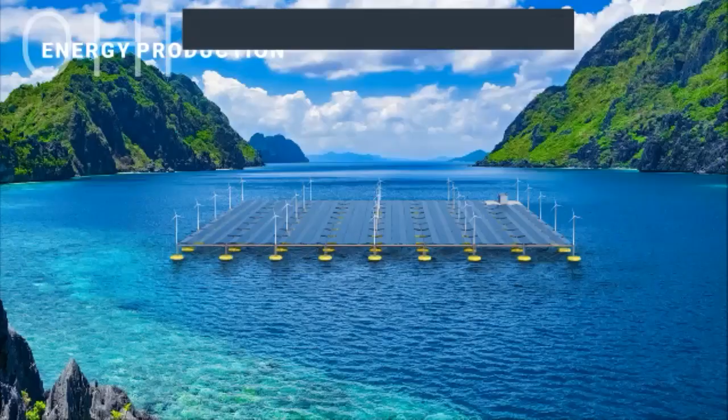What you see here is more or less the base situation of our hybrid platform. We have developed a floating power plant, which is able to produce electricity out of ocean waves, solar radiation, PV, and small wind farms, all combined on the same platform and connected with the same electronic smart grid system. In the back, you can see it's also used for platform facilities. This is a real ocean-designed solution for harsh environments, strong waves, and strong winds. A really cool thing here is the combination of multiple renewable energies, which gives you the opportunity to customize the technological layout of the platform according to the climate conditions.

If you go into regions where there's a lot of sun but not so much wave or wind energy potential, you would primarily put PV modules on. However, if you go to regions with a lot of wind and wave, you could increase the share of wave and wind energy. A little bit more you will learn about this in the presentation. We also have storage systems, etc. But this is the base - we can adjust in size and in combination of renewable energies, to the location and the requirements of the customers.

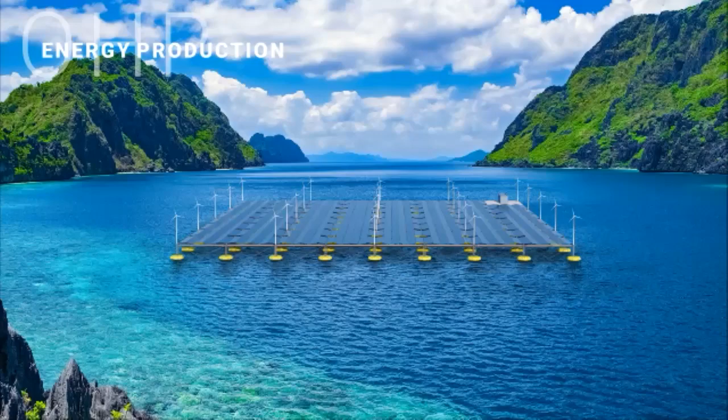Obviously we are not experts in aquaculture, but this is one vision that we have. We want to bring processing and infrastructure to the sea, and we want to do this all with a sustainable approach - a floating, low-impact solution.

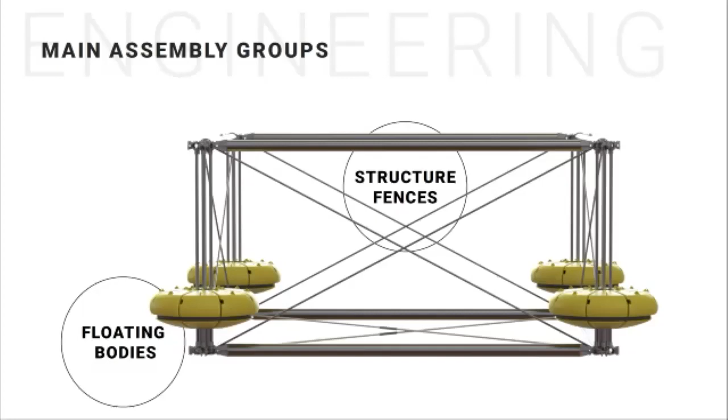Let's look a little bit into the engineering behind this technology. We're breaking it down into the main assembly groups: the structure fences and the floating bodies. There's a lot more detail in the small parts, but we won't go into too much detail, it would take too long. I think what we'll show you now will cover the fundamental principle and show the ease of installation and handling that comes with the OHP.

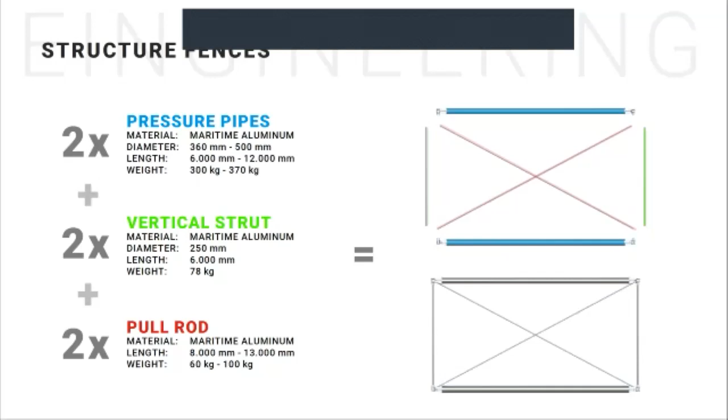Yeah Johannes, let's go on, maybe we can explain the first parts. We have been trying and re-engineering our structure a lot of times to optimize and simplify the solution. In the end of the day it looks super simple and trivial, but coming to this point needs a lot of engineering. It has to restrain big waves and storms in the ocean, and it has to be easy to manufacture, easy to build, everything. So all this comes into this product, which in the end looks trivial and easy.

But here it is, we start with the structure fences. They come with pressure pipes, you see them in blue on top. They are 6 to 12 meters in length, so fairly long actually. We're talking about big pieces here, but they're not so heavy, about 300 to 370 kilos each.

You cannot handle this by yourself, but being a few people you could even lift it, or use small forklifts. So we've made sure we don't get too big parts, so we can install that wherever we want. The vertical struts are much lighter and 6 meters high, and the pull rod. In the end of the day, we construct a structural fence which is super stiff, made out of maritime aluminum, without any problems in corrosion, and durable.

At this point, Philipp, there's two important things to add.

One of them being, of course, that these pressure pipes are welded, they are sealed, which means that they can float. This is one important aspect. So they already have their own buoyancy.

And the second thing that I would like to talk about, because this is a question that I get asked almost every time we talk about the OHP, what about corrosion? Yeah, I have given that for short. We have found that the corrosion is solved best, and we don't have problems anymore since 2015 actually. In the beginning there was, but now we found a really good maritime aluminum with small connection pipes of stainless steel. So you have a really durable and robust saltwater-proof solution. So to cut a long story short, we don't have problems with corrosion.

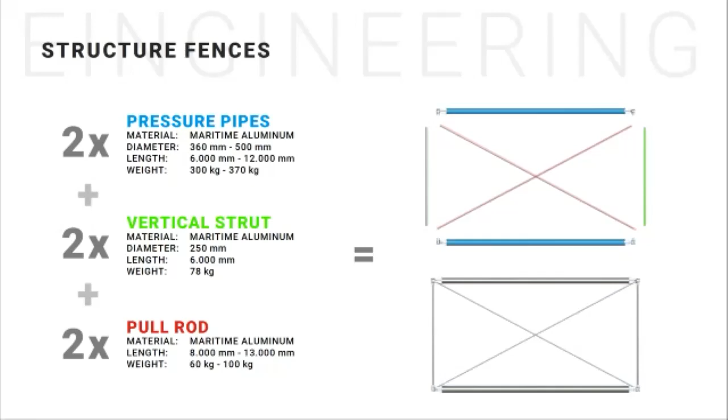No. Perfect. All right, now let's move on to the second main assembly group, which you can see here are our floating bodies, obviously also following the same modular approach, easy to handle, not too heavy, can be fitted into containers for shipping and stuff like that. What is special about these floating bodies? Yeah, as with most of our products, we have patents on that, because all of our products are new and we are approaching a new market.

And the speciality about this floating body is this floating body gets the whole force of the waves. It's the first interaction with the waves and the environment of the water, and this has to be super durable, super stiff, super hard. And the solution here we found is a polyethylene solution, which is designed like a cake. So you have many small pieces, you see them on the top picture, which come together in a connection hub in the middle, which is made out of a strong metal.

You bring them together and you put a belt around so it cannot fall apart anymore. And that's it. It's super simple. It's relatively small and lightweight parts each. And then you can design a floating body of a lifting capacity of 6 tons with a diameter of 3.2 meters and a height of 1.5 meters.

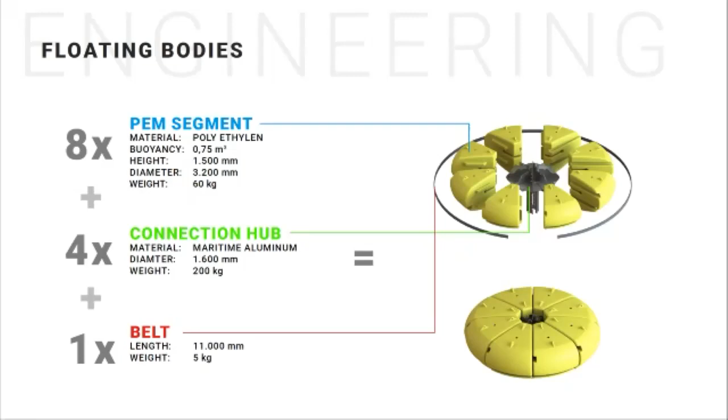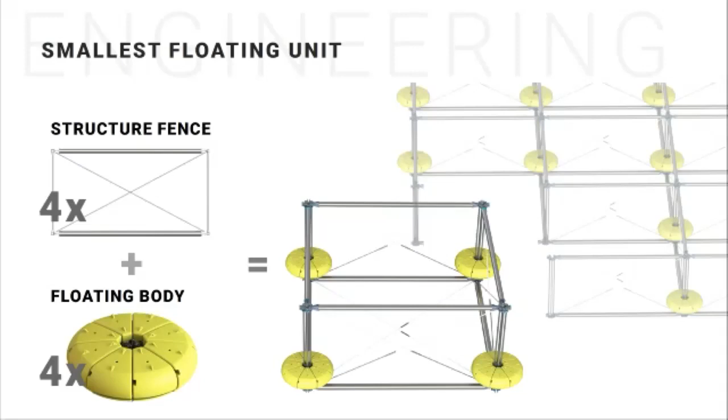That's quite amazing. Absolutely. So now when we put the structure fences and the floating bodies together, what do we get? Yeah, bringing 4 of these fences together, adding 4 of these floating bodies, you get the smallest floating unit. So that's what you see here in the front, and from there you can go on. You can go in either one direction or in both directions, and can increase your platform to any size you want. And therefore you're super flexible in the dimensioning, and obviously you can design any large floating platforms starting with small parts. This was not possible until now. Any big platforms in the world, they need big ports, big cranes, and then they can be designed.

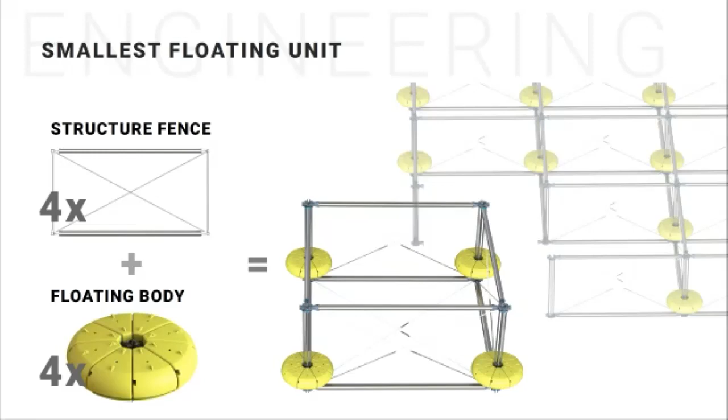Perfect. I think we have a demonstration video on the installation that we will show you later on in this presentation. But now obviously we have shown you how the technology, when assembled, works and how this modularity and flexibility can be brought into the OHP system. What you saw in the visions before, obviously, is much more the use cases that are accompanied by this technology. And it's important for us to give you a better understanding of the customization opportunities that come with the OHP in order to make these different use cases possible.

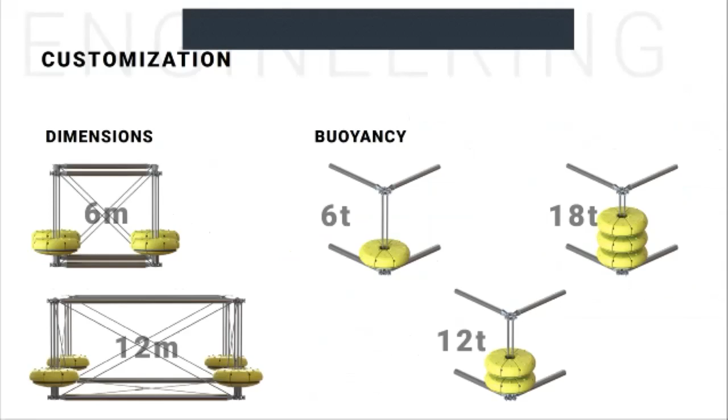So we can vary a little bit in the designs. Everything is designed to be modular, to be easy to build. And what you see here is on the left side a dimensioning. You can change between a distance of 6 to 12 meters in each of these squares. Why would you do that? Because when you have stronger forces, especially for carrying heavy weights on top of this platform, you might want to have a smaller distance between each knot. And it's possible only by changing the length of these pipes. All the connection points etc. are exactly the same as they were before.

On top of that, we can vary the buoyancy on each knot by 6 tons. Each floating body has a buoyancy of 6 tons upwards, and you can add to each knot up to 18 tons of buoyancy. That makes a lot if you calculate it in a square.

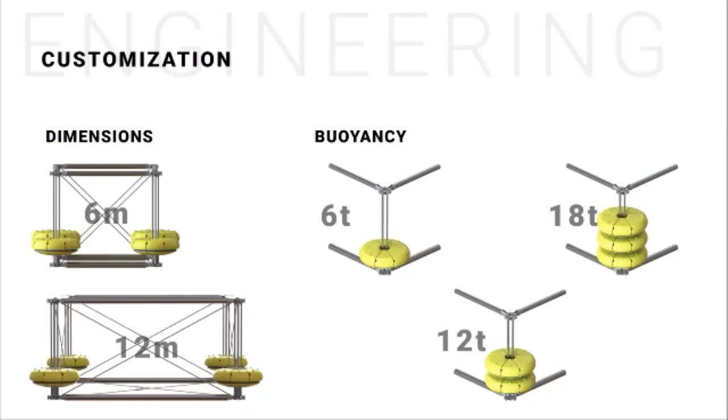Absolutely. All right, so now we've learned about all the technical stuff, but now it's also really important to talk about the renewable energy integration. And I want to start off here, Philipp, with the wave energy integration, since this is also where SINN Power initiates. And I think it will be really simple to explain, because it's such a simple principle how it works.

Yeah, I hope it's simple, but I think it's simple. Imagine you have a given platform and not every knot is connected with a floating body here in the side, the black floating body now, to get a better understanding. So the platform is given, some of these floating bodies in some of the knots are installed. They are actually installed without vertical movement, so they're fixed to this platform.

Then you go with a lifting rod in red, you come from the bottom and push this lifting rod into the center of this knot and connect from the outside the floating body. So the floating body is separated in parts, so you can install it after you have installed the platform itself and connect it then with this lifting rod in the middle.

This gives a flexible floating body which can go up and down with the wave, which is connected to the lifting rod. So when this goes up and down with the wave, the lifting rod goes up and down. And on the top, we put our Modtronic powertrains, which are computer-controlled electrical machines, which then run with the movement of the vertical rod up and down and produce the electricity in the wave power module. That's as easy as it is, and it's really not much more than you can see here.

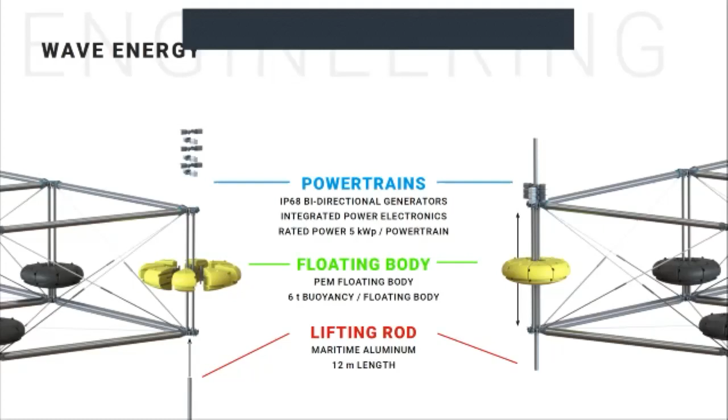Okay. Now, the second solution, which shares a lot of components with the wave energy, is the wind energy solution. Philipp, please explain. So having the same platform again, you use the knot, this time not for wave power. You have to decide. Either you can use wave power at a given knot, or you can install wind power. But we use the same mast. The pipe, which is running up and down in the wave power device, can be fixed to this knot, so it goes above the platform, and there we can install a standard windmill.

We have a special windmill here. This is a cooperation development with our partner and friends Luvside, which also live here close in Munich. And they have designed a super nice windmill, which is storm resistant and can still run in storms and uses the same power electronics we use all around our systems. That's the Modtronic powertrain, which we will also explain in one of the further slides.

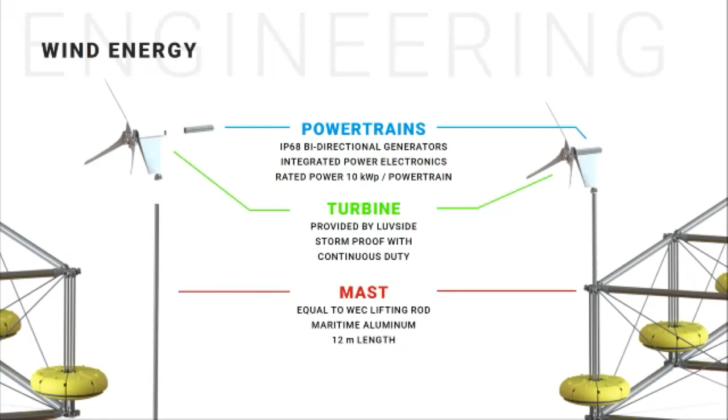But just to resume, the powertrain is the same and the mast is the same. So 2/3 of the system for wave and wind seems to be the same. Yeah, and especially we can use it and easily integrate it in our platform. That's a big advantage. And now, of course, last but not least, we also have a solution to install PV on our OHP. Obviously, if you have a large surface that you're already providing, it absolutely makes sense to install the sophisticated technology here.

Philipp, I think the really crucial aspect here are the traverses, which are able to withstand these forces. So please explain a little bit. Yeah, we have developed lightweight traverses which have a length of 12 meters and only weigh 130 kilo and carry 1,000 kilo per meter. That's quite a lot for this span of distance.

So we place these traverses in the same distance of the length of the PV modules, one to the other, and then we just put PV modules on top. We can vary the angle by installing these traverses on a different level, and then in the end you have a PV plant on top of your platform.

A big difference, which you should never compare, are inland water floating solar systems, which are coming as carpets. So these are flexible systems laying on the water, and when there are waves, they bend with the waves. We have designed a super stiff and robust wave resistant platform, which does not bend, or it bends obviously a little bit, but it doesn't bend with the waves over the length, and it has a high distance to the water surface. This allows to run this solar platform even in big waves, 6 meters breaking waves and higher waves in the ocean.

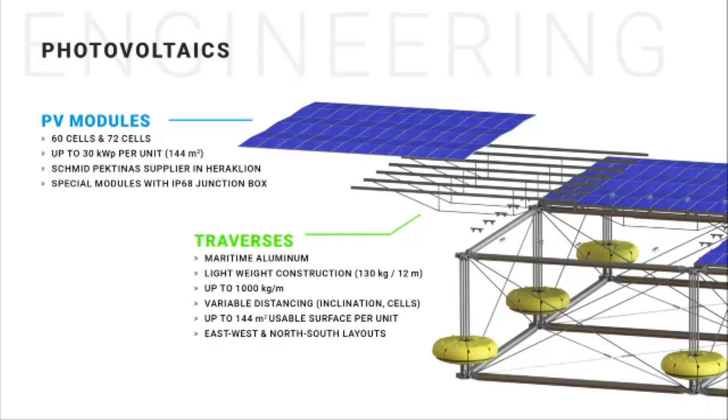Yeah. So the same principle we use in the PV to house the modules, or to have the modules on the platform, we can also use to put on solid floors, which obviously, if you have this amount of infrastructure or installed capacity, you require some of the fields to not be reserved for renewable energy production, but much more for electronics or for the other infrastructure that we have shown. Yeah, the industrial island, as we call it, to put infrastructure or any operation facilities onto it.

And because we can change the distance of these traverses, and they have by themselves quite a big carriage which they can carry, we can bring up to 1,000 kilograms per meter, which then, if you go in a distance meter by meter, means you can bring up to 1,000 kilograms per square meter onto our platform. This is quite amazing. This is quite a lot. This is more than you have in a typical house for the flooring, actually. Cool. So you can really build really strong and stiff, solid floorings for infrastructure use on this platform.

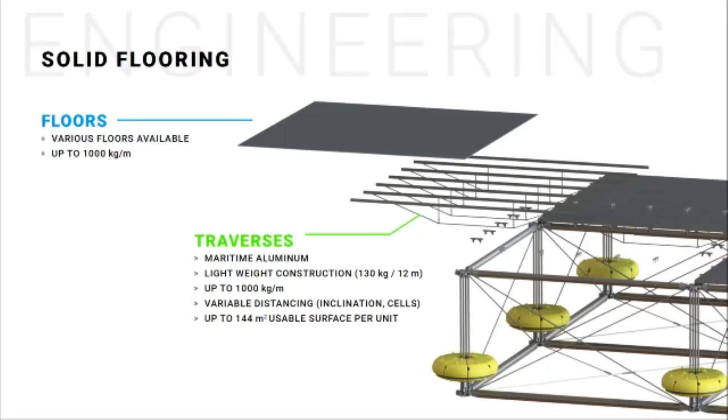Obviously, we do not manufacture the floor itself, but we have already made some cooperations here, and there's a set of different floors available depending on the use case and depending on the loads that have to be carried, but they meet the substructure at this point.

All right, so now the OHP, we've shown the use cases, we have talked about how it's installed, how it's set up, what are the main components, we've talked about the renewable energy solutions. But there's one really important thing we haven't talked about, and that's how does the OHP stay where it's supposed to be? Yeah, we have decided to go modular again, because it just makes sense. If you want to go from small ocean hybrid platforms to big ocean hybrid platforms, you don't always want to design a specific anchoring. And especially when it goes big, then you would need enormous anchors. So what we do instead is to have a multiple anchor.

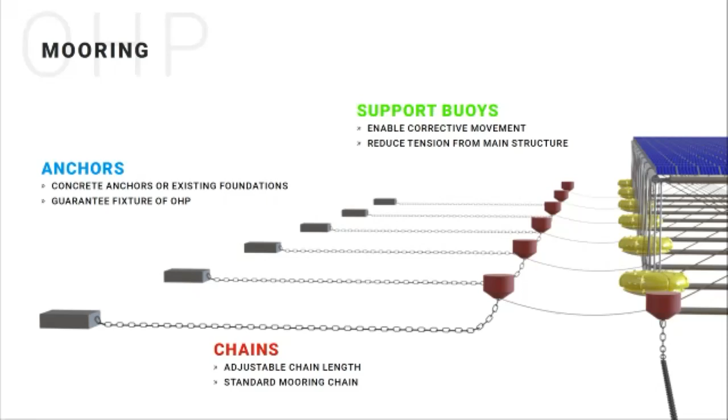This has many advantages. First of all, it's more or less standardized. The prices are much cheaper for the overall anchoring. But second, it's easier to bring it there and to install it there. And last but not least, it has a much higher security, because even if a single or two or three of these anchors would break, all the others would still hold the overall platform. So we think this is the best approach for this anchoring, to go for multi-anchoring here. Perfect.

So now that we've talked about the mooring, anchoring, let's talk a little bit about logistics, because all of the engineering and design and all the thought that went into it also had a lot to do with how can we transport the OHP all around the world, and how will it be able to be installed and handled easily? Yeah, I mean, no matter if you are in Heraklion having big facilities in ports, or in other big ports in the world, or going to a rural area in the world, it is important to make transportation and logistics and facilities easy to be installed.

And this was one of the main focuses and goals in the development of this OHP, that we can transport all our parts in given transportation systems. So we don't need specific transportation. We can put this into containers, we can put this into typical trucks which you see every day on your highways, and then we can bring it to any location in the world.

There we can install it with really easy equipment. We don't need super large cranes, etc. And this brings also another point into focus, the procurement, where we get our goods. Only a few of the smaller parts we produce ourselves in the power electronics, but the bigger parts, we're obviously not specialized in producing big pipes, etc.

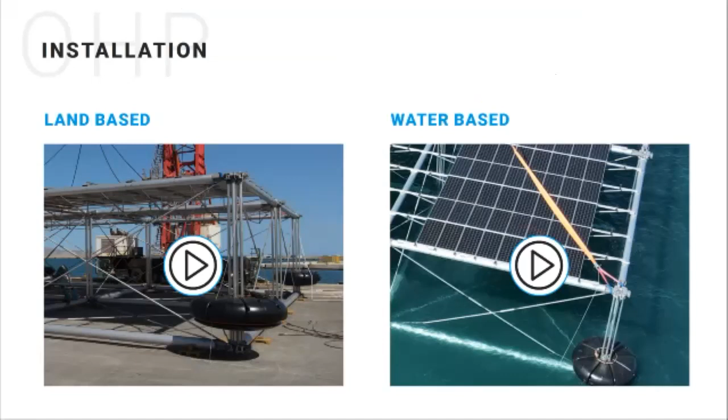And then we have a simulated video for our patented floating installation system, where the entire OHP can also be set up on the water. I will now change the screen so that you can see these videos.

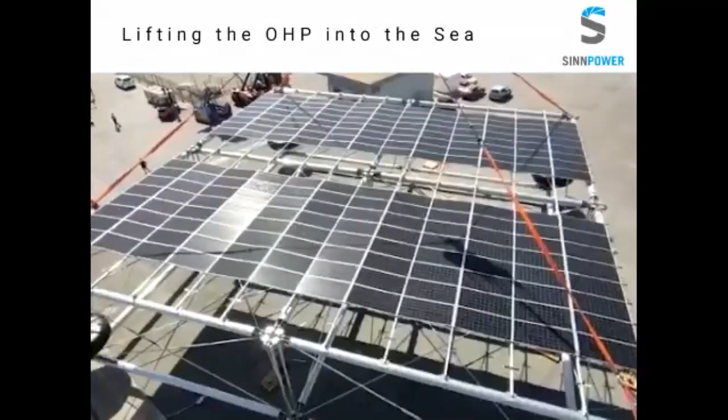So it was the installation in Heraklion last summer. Thanks to our team there. This was quite a bit of work because it was all new, but it worked out really well actually. And this was how you can build it when you have a big port. It's obviously easier when you do it on the land side, because you don't need to work from boats and smaller platforms to install this.

But we can install the overall platform, and this is also integrated and detailed designed and also explained in a patent, how we can install the overall platform when there's no port given and when there's no big machinery given. And this is actually a quite tricky part, but it also works.

So what you see here are two fences. We built them lying horizontally on the water. You can do this in really shallow water. You get these big pressure pipes. They are sealed, so no water can go into them, and they float horizontally. Everything is designed so that it can be installed super easily when it's horizontal, and you don't have screws and nuts.

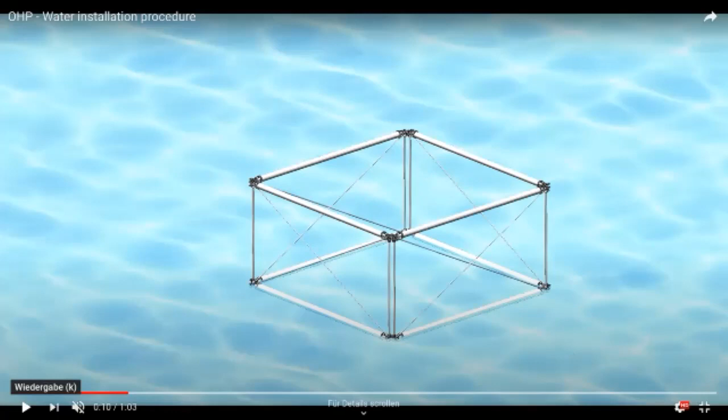When they are vertical in the water, you connect them and then press air into this platform again. So the whole triangle comes up to the water surface. The floating of the lower pipe is strong enough to carry the overall platform. So when you've connected it on the top, you don't have to dive. You just connect it on the top. It's obviously not stable then. It's only a loose connection, but it has a small stability, and then it comes up, and then you come with another third, and that's the first piece.

Obviously, from there you can imagine how to grow this platform bigger and bigger. You come with fences, go from horizontal to vertical, take another fence, go from horizontal to vertical, connect them, lift them up to the surface and connect them to the given structure. And in this way, you can install it anywhere in the world really easily.

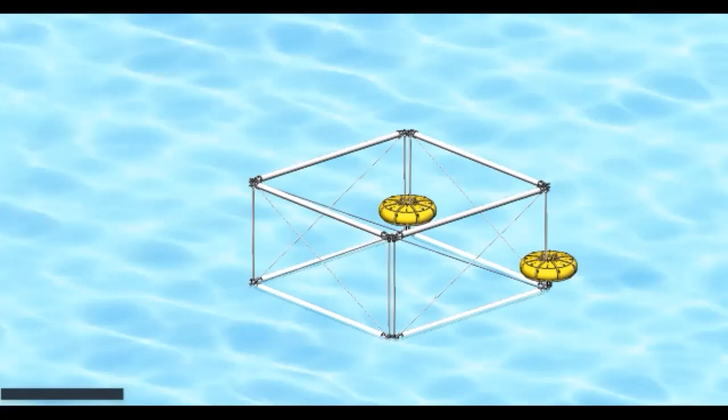So going on, you see now how we install the floating bodies. You have the internal strong connecting pieces, and from the outside, you bring the floating bodies. And then when you have that, the whole platform is lowered down to its final floating position.

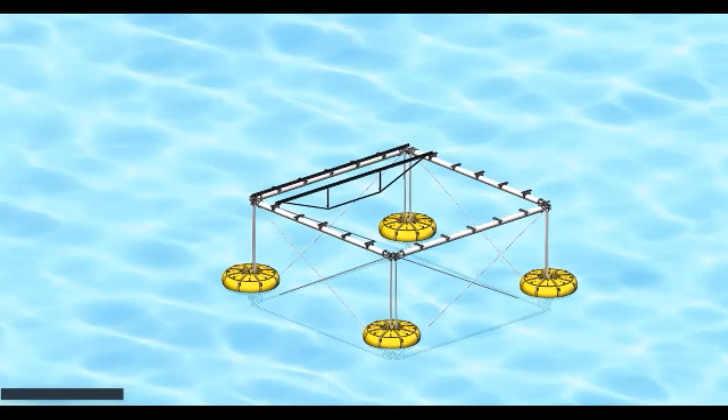The lower pipes here, what you see here is the installation of the solar system. But another interesting point is that with this pipe system below water level, you can also use this later for cooling. When you have a server farm, you can take the same pipes which you used earlier for installation by pumping in hot water on the one side, going through the ocean and going up again.

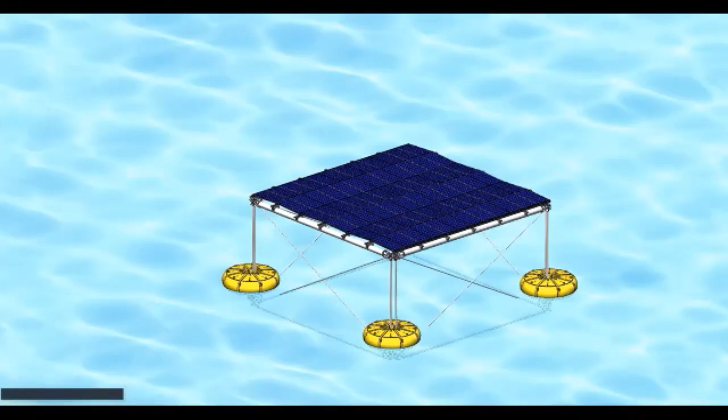And you have a super robust maritime heat exchange system at this point. So when it comes to operations, you can also use the same facilities, not only for installation, but also for cooling of any heat source. Great, Philipp. Thank you for explaining a little bit on these videos. Let's jump back into our presentation.

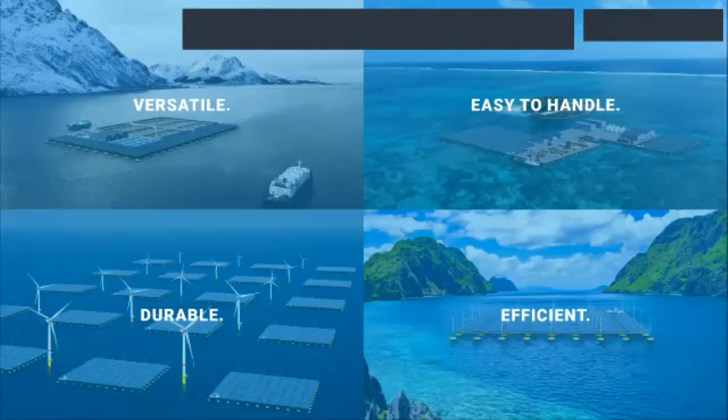So, Johannes, we've talked so much now about the use cases, how it works, how it's installed, how to transport it. Let's just sum up really quickly what we've learned so far. The OHP, it's really versatile. It can be customized in layout and setup to meet every application or process that you can imagine on sea. It's easy to handle. The components are rather lightweight. The dimensions are designed to fit into standard shipping and logistics solutions. So also on this aspect, we have put a lot of thought into it.

The components are extremely durable. Obviously, there's no point in designing or constructing anything that will not survive in the environment that it's meant for. And it's very efficient, not only because we have put a lot of thought into it, but also because this modular approach allows for a high repetition of the components, which immediately goes into extreme economies of scale. Yeah, I fully agree, Johannes. Thank you very much.

I think now we have to ask you to go to the next topic, because the platform itself is a plain mechanical issue. So how do we do these renewable energies? Yeah, of course. And now maybe this is the part where it becomes a bit more complicated to understand, because now we're going into bits and pieces of electrical engineering, which is also one of the main focal points of SINN Power since a couple of years.

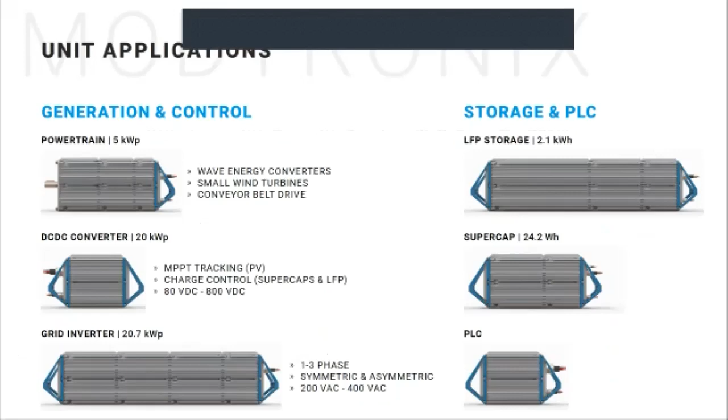Full flexibility. So summing this up, we have different modules, and you can put them together. This is a sample of how you can put them together. And when you connect them, they're not only mechanically connected, but also electrically and on the communication side. Is that correct? Exactly. Pretty cool.

Here some samples out of many possibilities you can adjust Modtronix to each other, is here the powertrain again. This is a smaller version, which you can see on the top side. It's a single machine with 5 kilowatt. Then you have a DC converter with 20 kilowatt.

This can be used for solar fields, so you run the solar fields with that. You can charge batteries and super caps, and you can discharge. All our solutions are bidirectional, so you can go in and out with the electricity.

On the bottom left side, you see a sample of a 20 kilowatt inverter. This inverter allows 3-phase and asymmetric power supply, so each phase can be fully powered without powering the others. This is really special. It can power directly into the grid, and it can build its grid by itself.

So it's off-grid and on-grid use. On the right side, on top, you see an LFP, lithium ferrophosphate storage solution, together with its power electronics. We always have the power electronics not in the switch cabinet; we have it integrated directly at the point where it's needed. The super cap solution, and last but not least, the PLC control, which is the interface to us, because then we can have a picture on our computer and see all the power plant which is assembled.

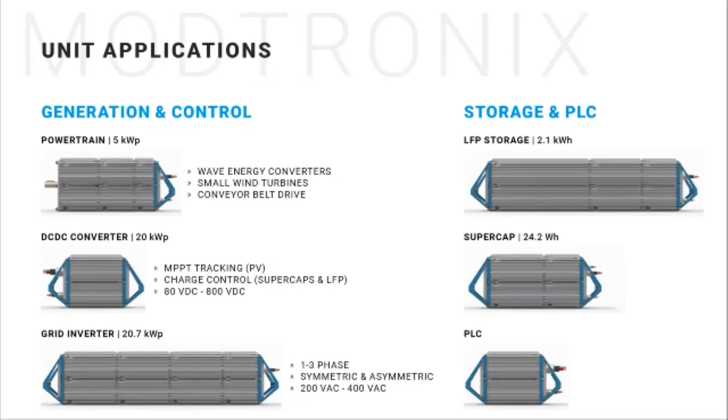So what we showed you before are unit examples. These can be used, for example, as regular inverters, as you know them, for your homes or for the application in a wind turbine. Obviously, when you look at the OHP use cases that we have shown you before, we're talking about really large, complex electrical networks, and it makes absolute sense to bring the Modtronix components together into one place to make sure that also for operations, service and maintenance, you have a single access point where to reach out and where to do these works.

And therefore, we have developed the SINN Power Cube, which basically is an IP68 SINN Power development of a switch cabinet. It brings together various of these Modtronix modules, and it's what we define as our network solution. We can combine different renewable energy sources through the power cubes. We can integrate long and short term storage, so we could, for example, have one power cube just with storage units, and one with inverters next to it.

And obviously it also functions as a grid connection point. And also very important, Philipp, in the power cube at the bottom, we can integrate transformers to go to a high voltage connection if we have to cope with larger distances from the OHP to the grid connection.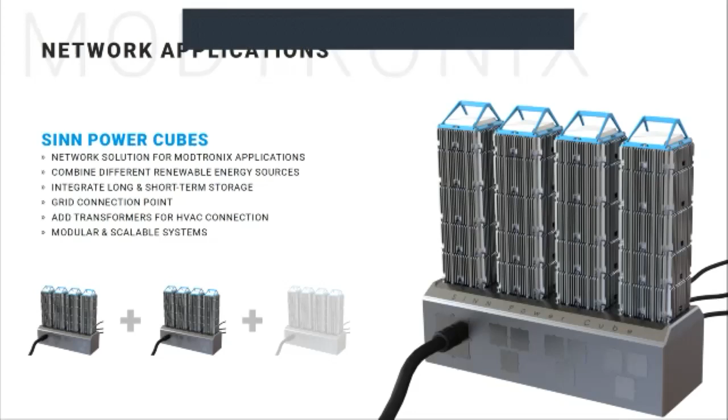So going from small pieces which are handleable to large systems, and that's what we want to show you here, how this in principle works, really broad and really rough. We can use this Modtronix. Imagine each of these pictures is a system, a string of these modules fit together. You can go either on the ocean side or on the land side.

The smart grid obviously is independent of ocean or land side. You can even go below, digging this system into the ground. So for instance, when it gets hot in the summer, you don't need to go for this derating, which you typically need to do with power electronics, because you're still in the cool air, since you're 1 or 2 meters below surface.

But then when you have this supply given of wind, solar, or wave technology, or anything alike on the land side, we bring these components together by our power electronics and control to an 800-volt bus. This bus is our base to distribute electricity from supply to demand and backwards. It's a bidirectional system, and you can add as many pieces to the system as you want.

So here, land side and ocean side, you could feed a couple of houses which are off grid, doing its own network at 50 hertz, and in parallel have a feed-in at another place. That's the full flexibility we need on our platform, because we have different sizes. We always use the same solutions for wind, wave, and solar, and for the demand side when we want to feed a cooling house or a hydrogen plant, as we're planning now in the Canarian Islands.

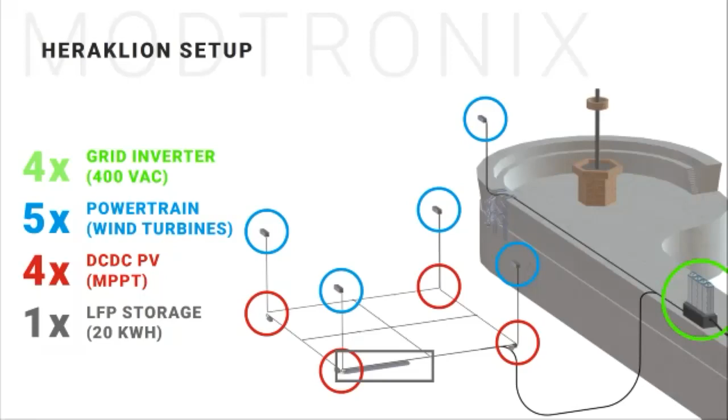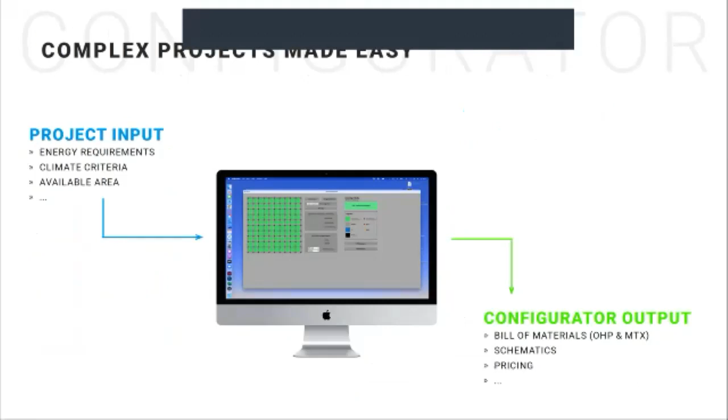All right, Philipp, thank you very much. We will now change the topic a little bit, because there's been quite a lot of information given to you up to now. We thought, how can we further facilitate not only the planning but also the execution of these types of projects? When you have a modular structure and a modular electronic system, you obviously need some sort of tool that helps you combine these.

So I would like to welcome now my colleague, hi Christopher. Hello. I have a picture of you on the next slide. You're wearing a mask, obviously, but everybody will know what you actually look like.

Hopefully. Before we start, we have an input-based configurator that gives you layouts, is that correct? Exactly. We want to reduce the complexity that would come if you want to design large systems with multiple part groups, and also difficulties due to layouting. First we had done this all by hand, realizing it takes too much time. We just want to satisfy the needs, demands, and questions from interested parties, and therefore now we have a tool developed that enables us, in a few minutes by a few clicks, to generate large systems.

Initially, I remember we had some interest here, and I came to you and said, listen, we have to kind of lay out this platform for this customer. I remember it took like a week to put all this information together. And now, whenever we have a lead, I come to you, and after 30 minutes you come back to me, and the project is almost done, which is really amazing.

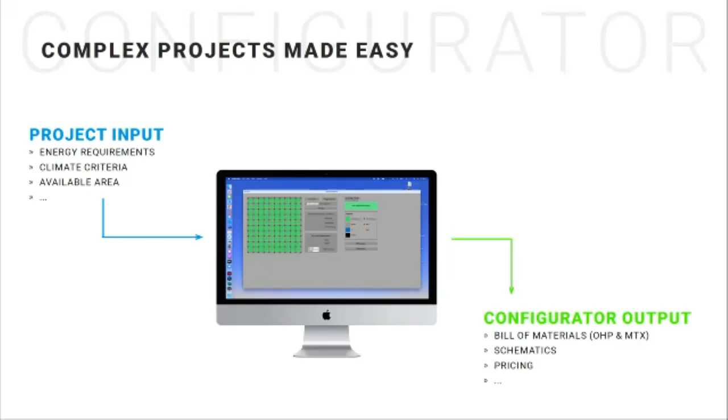Here again, you can see what Christopher normally looks like.

So in order to show you how the configurator works, we've decided to build a little showcase, which shall be placed in Heraklion at our R&D facility. It's an OHP size 72 by 72 meters, which is 6 by 6 units. 35 of these units shall be installed with PV power, one of them as a structure, as a floor to install the 2 MWh of storage that I've added. We have 4 wind turbines, 4 wave energy converters, and of course you want to feed into the grid, maybe 1 megawatt peak, 3-phase, 400-volt AC.

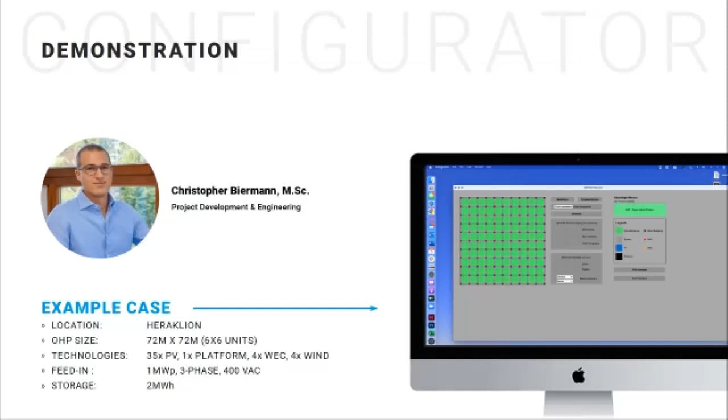Great, okay, so let me pull up the configuration tool for you. The stage is all yours. Thank you for the mouse. So we have 2 configurators.

One being for the electrical one and one for the platform. Here right now we want to start with the platform. I think the demands were 6 by 6. Okay, let's quickly type this in, or just click it.

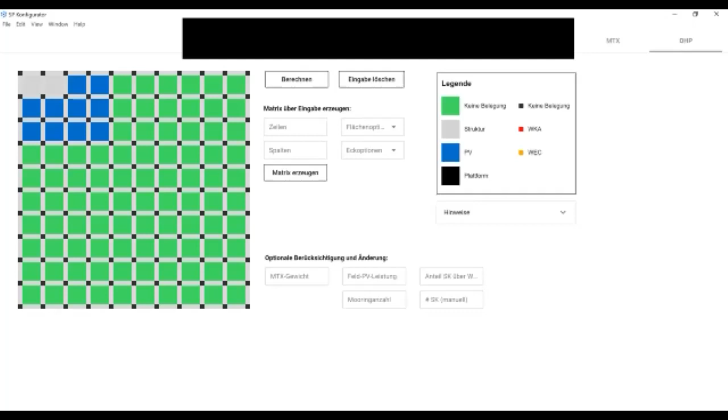It's very easy, and for the purpose of this demonstration, usually you would just generate it by typing it in on the right hand side. But now we're just going to generate it by hand. This was the first approach that we use. It still takes up a few more seconds, but you can still generate the system.

As you can see on the bottom here, we have a larger system now. It's a 3 by 4, so 12 squares, and now you have multiple parts that you can use. If you have the structure now, I thought we also want to integrate some wind power.

Let's go ahead. By clicking the knob points, you can decide whether it's a wave or a wind installation. So now we have 3 red dots, which is the small wind. By double clicking, we get orange, which is wave. And then we could recalculate this.

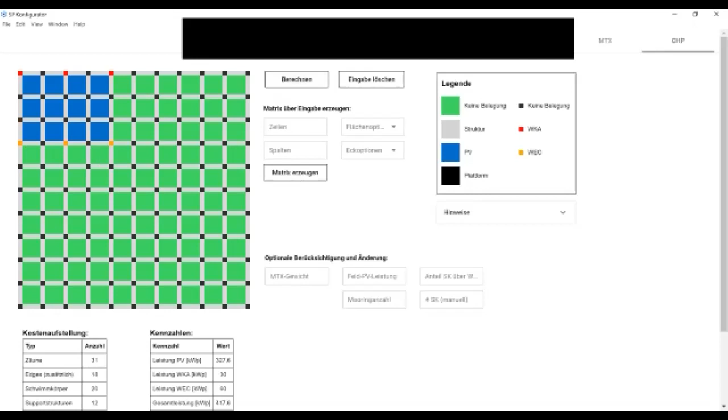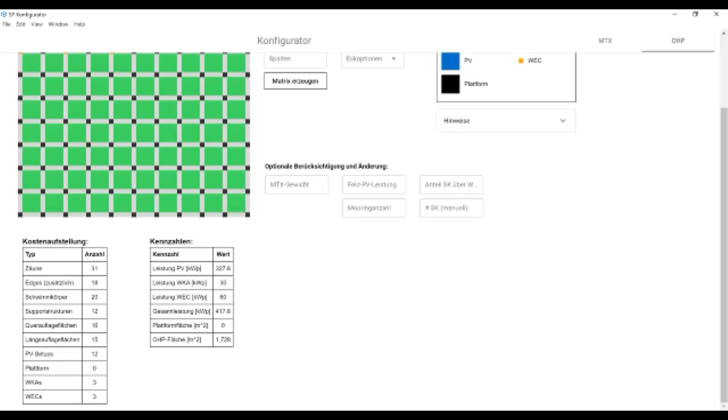So what's really interesting: Zäune is the German word for fences, and Schwimmkörper is the floating bodies. You can see that we immediately get an idea of the amount of different assembly groups that will be installed in this platform — small wind turbines, wave energy converters, and the PV setups. On the right side, you get a first indication of the installed power of the different energy sources, and the surface that this installation will take up.

Let's see whether on Windows we can go into the electrical. So now we've looked at the mechanical aspects, the platform itself, and now we will transfer this information to the electrical side to understand how this system shall look like.

The key is not working right now, so I think we have a problem with Windows here. I would just send the video afterwards on the website, so we can see the configuration for the electrical parts — it's opening some other windows. So therefore I would reschedule this.

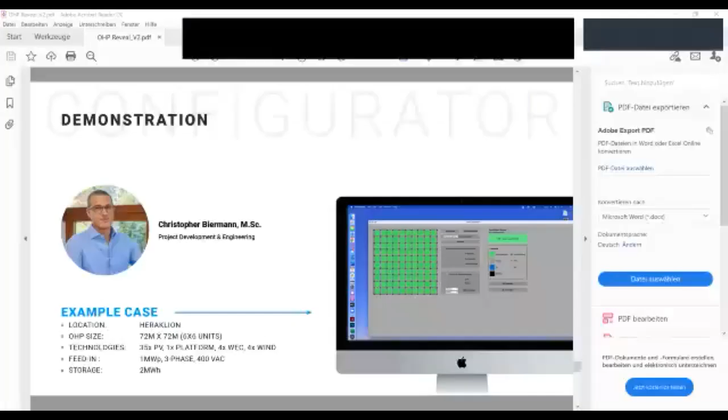Let's go back into full screen here. Obviously, it also cuts a lot of the time that I spend doing this, and Chris too. So it's a really big help for everyone.

So now let's come a little bit here to the end. It's really important not only to share our technology, but also the scope of our works, of our services. As we have developed all of this technology, we are happy to be alongside our customers and our partners the entire way. We have highly skilled engineers here for project layouts. We have set up a supply chain, so procurement is within our scope, and we can supervise any type of construction since we have already installed our demonstration projects. We're really along here all the way. Obviously, initial operations up to the transfer of the plant is also something that we are happy to do.

And SINN Power, as a main supplier of the major components within these OHPs, will be able to offer service contracts for O&M, and we will cover from the very beginning to the very end. We will be your partner alongside, and we're really looking forward to getting in touch with you to make sure that your vision of the OHP or smart grid applications with Modtronic become reality.

Yeah, I think there's not much more to say to this. I must thank you very much for attending here. I hope you are as fascinated as we are by our ocean renewable energy solution. Really a way to go into the future and change the world to a better and more renewable situation. Thank you very much for listening.